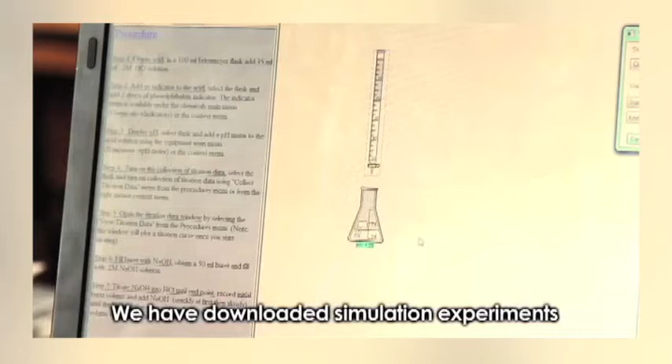We have the workstations. We also have laptops for researchers. Now we've taken the workstations to secondary schools. We have downloaded simulation experiments to help the students to understand the experiments that they are missing from the real life situations. It's working, but I also believe that we still need more complicated experiments that can help them understand it better in 3 dimensions.

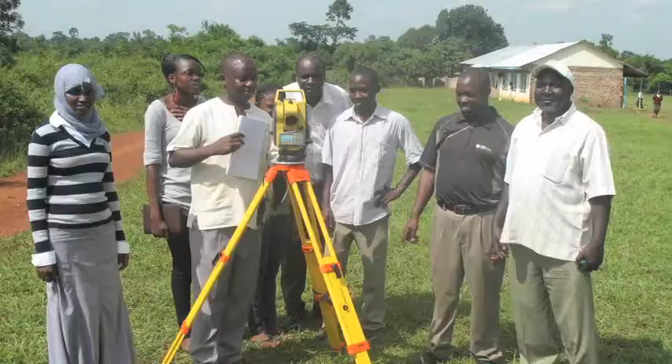We intended to design a learning experience for our students so that they could simulate a real-world design build competition by working on a project that was relevant and was actually gonna happen. We had several phases in this project. First, the students in Kenya from the civil engineering department went to the rural school, they surveyed the site and they tested the material. Then our students here at the University of Washington used their results to come up with suggestions for the different materials that could be used in the school.

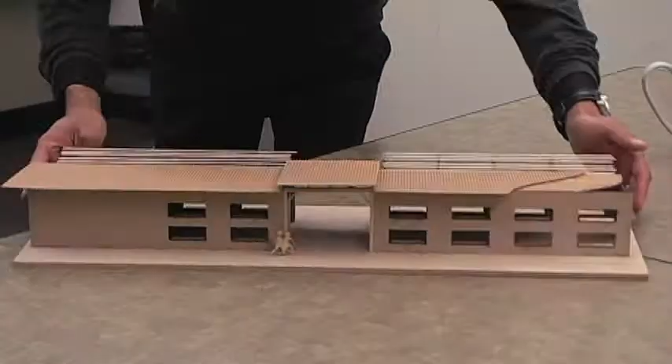Then another group of students designed the school, and then in the final phase, other students from the civil engineering department in Kenya will go to the construction site and use the suggestions that we provided to actually build the school. Really, the goal of the project is to create a collaborative environment that's bringing students together in ways they might not have other places, to engage technology they don't have in other parts of their life.

We were divided up into groups. The groups consisted of both CM students and architecture students. That was done just to kind of get that dynamic between the construction side of it and also the more aesthetic architectural side of it. My name is Tara Harrington and I am a construction management student here at the University of Washington. And my name is Jake Antles. I'm a senior studying architecture at UW.

Our team researched various building materials, particularly for the roof and truss system. Specifically, I looked at alternatives such as sheet metal or reinforced concrete. My team was in charge of doing the interior wall and floor finishes. I found it interesting that a lot of the materials that are used in Kenya are very similar to the materials that are used in the United States. It made research for the project a lot easier because we knew what types of materials we needed to look for.

My team was given a single contact, a student in Kenya, and we contacted them via email. It was really interesting knowing that we were working on the same project, but we're separated by thousands of miles. The best part about working on this project was being able to work with the architecture students here at UW, and we actually can see the results that we researched now going into play with the design and build of the Kenya project.

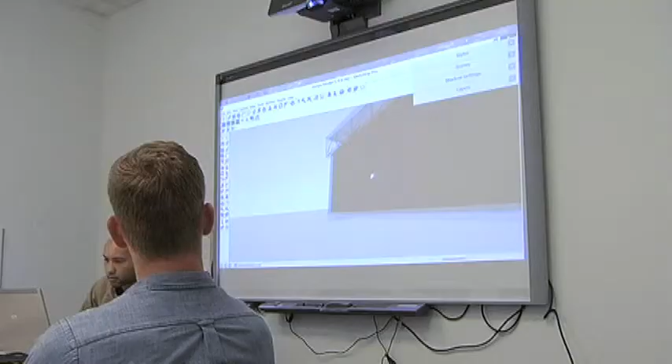Are your doors always open then? The truss space is open. The bricks all stop at that bearing height for the trusses. You can't go to the site, so it's really hard to design a building that makes sense for an area you've never been to and you can't go to. Materials are not scarce, but you have to use them in a different way.

I think one of the biggest challenges, at least for our team, is to figure out how to use some of the new materials that are available in Kenya that we don't really use or design for here. The question of building it could be a little bit more difficult. We don't want to have to be cutting every brick or shaving them. Yeah. So from my experience, there are concrete columns and a little beam that would carry the entire load for the structure, and then they go back and refill with stone or brick. What I took away from the meeting is that using the resources that are available is really critical.

Also integrating it with the culture. People will walk over to see the building, and they kind of tend to take pride in this special building that was built for the community.

I was wondering if you had any experience on the availability of methods on how to tie the trusses down. I, being a civil engineer, know what kind of sizing of different materials or the hardships of constructing a type of building like this. We had to troubleshoot a little bit and see how we can construct a whole entire school building without power tools, special forms and curvatures on the building to make this thing really constructible, but at the same time visually appealing.

The outcome of this phase is this final competition where students will present their final product. We have 3 teams of students that will be presented to a jury of industry representatives. Later we will hand over this information to our colleague in Kenya who will use them to build the facility.

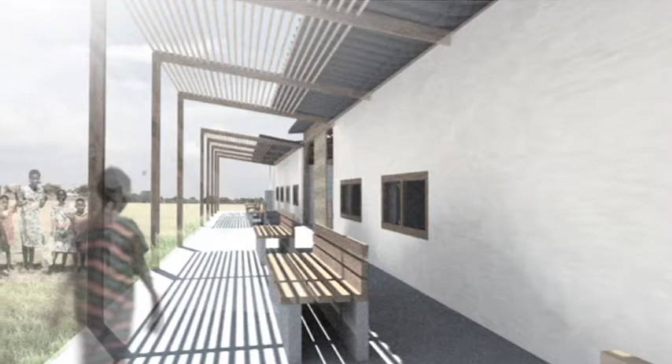This school should be people-oriented, user-oriented. It should be culturally acceptable to the local people there. We developed a shading system made up of local material, which is bamboo. And those are located along our overhangs in those windows, those workstations, where students will be placing their laptops, and will allow a lot of shading for those spaces.

What is sort of the life expectancy of the building, and when things need to get done, more of a plan for the occupants to be able to take care of those items on their own. Durability was an issue, but it was kind of this balance between conserving materials and then making the building more durable. Our idea of durable is very different than it is in a country like this, where they have to kind of continually take care of things. So thinking about things that can be replaced easily.

I think our presentation went pretty well. Maybe some of your ideas stick and some of them don't, so just the kind of balancing act, and I think that is applicable to the real world and moving on into a career.

We are team number 2, and this is our presentation for the Kenya competition. The goal of this project for our team was to design and develop a building that not only could be built for this school, but could also be replicated. One of the materials that we're pretty excited about is our use of the rammed earth. The thickened rammed earth will provide some protection from that heat and give us kind of a natural cooling element.

Additionally, we're using locally sourced brick that we cast on site. They're non-standard, so that's something that we had to play with a little bit, something that's not going to be a very specific size in the program. We're attempting to equip the people in this region to make other buildings of this sort. They can easily make this again for another use in another location. We tried to design for this school, but also use techniques and materials that were easily accessible and could easily be constructed in that area.

I really appreciated your thinking in terms of all the different materials and thinking beyond just making the building, but thinking about the local economy, perhaps engaging women. I think that's really an important aspect to working in these types of contexts. We all worked together really well and were able to put out a good project.

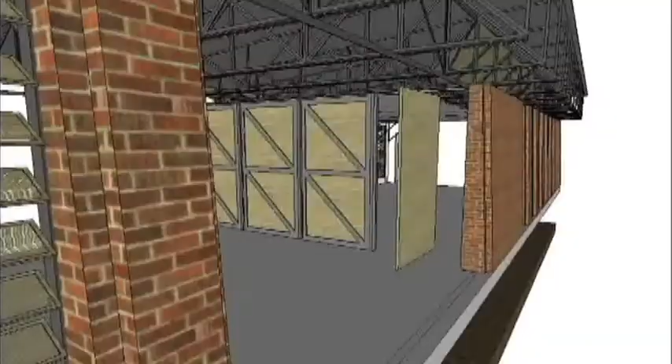We looked at a lot of images of schools in Kenya. We knew that we wanted our structure to be a gateway or threshold experience into this interior sanctum that they're proposing in their master plan. If this were to be built, it wouldn't just be a school, it'd be a beacon of the community. And the goal for us was really to create a thermally comfortable space that was well lit year-round.

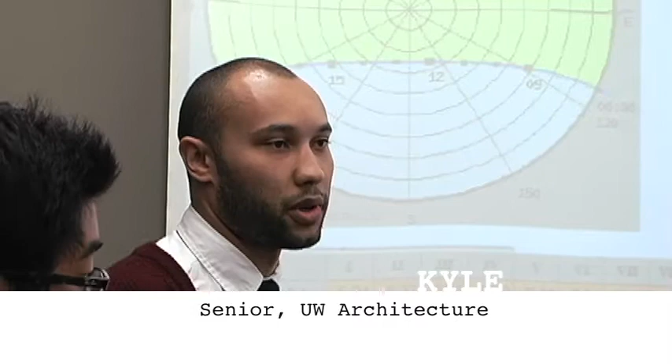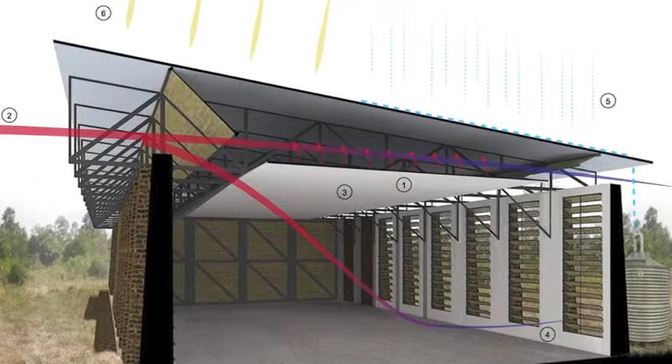As all the sun beams down on this metal roof, it's going to radiate heat, and that's going to make the space feel really hot. So we have to keep that in this high zone and then allow the airflow to shoot through there and carry it off. Truss 2 is a lot different than Truss 1 because they don't have that bracing into the columns. I brought a little bit more of a structural analysis to the group. I thought that was my key role in the team.

Working with architects, that was great. I learned how efficient they were. It was a good experience for me to have. I'm kind of blown away by the thoroughness here, just with all of the diagramming, all of the drawing, just the care, obviously, that you guys put into this. When I watched you guys present, my reaction is, man, that would be a fun building to build. I get excited about constructing it, which is cool.